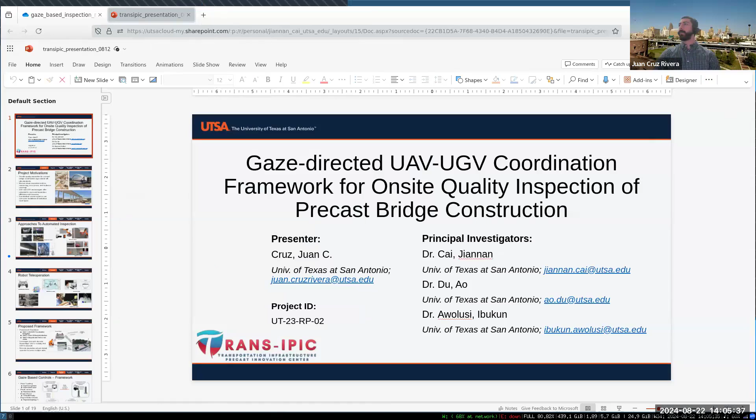Okay, so my name is Juan Carlos Cruz. I'm a master's student here at UTSA, and I'll be presenting our work on a gaze-directed UAV-UGV coordination framework for on-site quality inspection of precast bridge construction. So in these slides, I'll be going over some of our project motivations, as well as related technologies that led to our proposed framework, and then some of our developments thus far.

So one of our biggest motivations is that across the supply chain for prefabricated concrete structures and precast members, especially in the offsite fabrication, you have very thorough inspections that are done. For example, you have component dimensioning that's done after it's fabricated. You have different tensile strengths and material testing that are done, and various lab work that gets completed. And then once the bridge is fully constructed, you have very well documented and thorough regional and national level inspections that are done on these bridges.

However, when you get to the actual in-process and on-site construction, it can be a little more difficult to get very thorough testing and inspections done. As we see in the picture here, the sites can be very chaotic and dynamic, so it's difficult to get this thorough testing done. And it's for a variety of other reasons, like it's difficult to get sophisticated sensing and testing equipment out there. However, by doing it manually and having less rigorous inspections on site, we miss out on various structural deficiencies and defects that can come along with these members, either through the transport or something that was missed during the previous inspections.

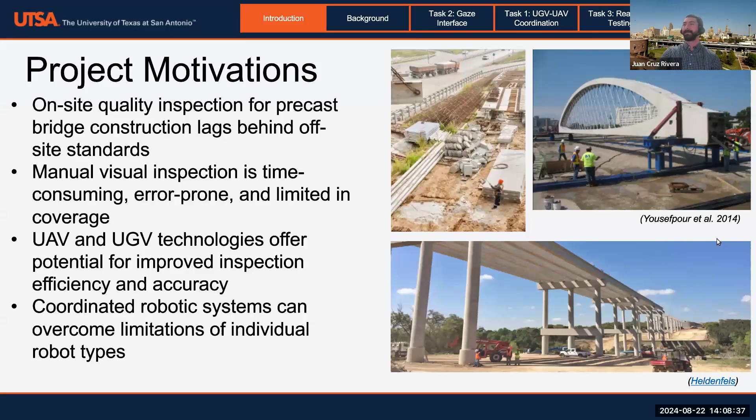So I'm going to discuss some of the other approaches that have been done to automate inspection. In some cases, we've seen works done that can do BIM to real monitoring. This can monitor different progress of a construction site to make sure structures are aligned and ensure the progress is going as expected. In the actual fabrication steps, you have intelligent robots that can be set up with different scanning equipment in order to check tolerances and see if there are any deviations in the output.

And all this is thanks to improved sensing techniques and technologies that let us get more accurate dimension and geometric dimensioning capabilities. We also see some specialized robots. In the bottom right corner there, you have a wall climbing robot that's able to monitor the health of different structures by monitoring the cracks and fractures that happen in these structures.

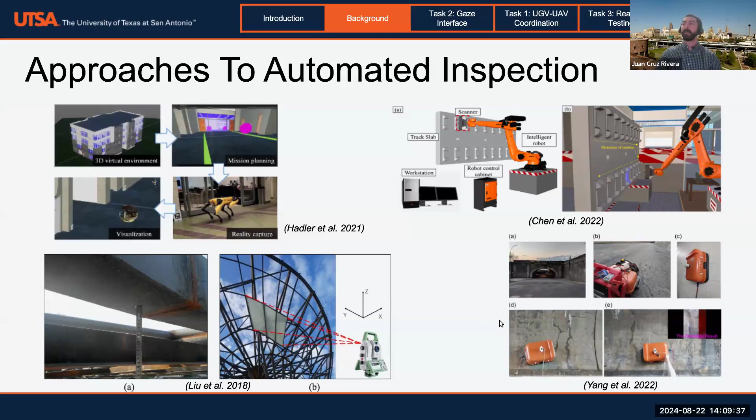One of the difficulties of these, though, is that generalized autonomy, having a fully autonomous robot, is still a very challenging task. So many of these robots are teleoperated. Teleoperation is when you have a human operator interacting with an interface, so a joystick controller or button-based controller, as we see there. You can also have pose-based control, where a human pose corresponds to a robot action.

You also see a lot of work being done with virtual reality headsets. It still takes advantage of some of the joystick-based control, but it augments the user's perception so they can see things maybe they couldn't see before and see them in a three-dimensional space. One of the benefits of these virtual reality headsets too is that they allow us to get gaze input.

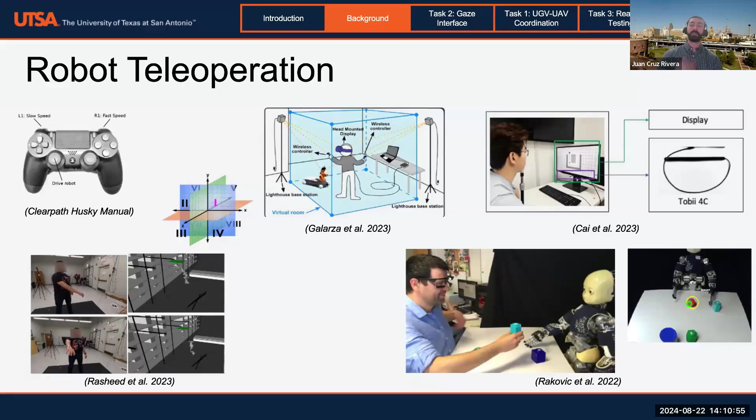In human-to-human communication, gaze is really important because it shows us the attention and intention of another party. It works the same in a robot-to-human task. We can use gaze to communicate objects of interest or to directly use gaze to control a robot through different mapping methods, as we see here.

So that leads us into our proposed framework. We broke down our framework into 3 different tasks that involve coordinated navigation between the 2 robots, using gaze-enabled and AI-enabled interfaces to improve productivity of the remote operator, and then, as mentioned before, to integrate and test these out in the real world, because that's very important in seeing the limitations of your framework.

Now, our proposed framework involves a remote operator. That means someone who is trained to do the inspection, with specific domain knowledge of how the inspection is supposed to be conducted, having them work in a remote office space or something like that, and then having the robots actually out in the field.

To circumvent that, we use ground vehicles, and that can be really any ground vehicle: quadrupeds, bipedal robots. In our case, we use the 4-wheeled robot. That robot would then go out with a specific payload suite, so different sensors and whatever is required for that inspection, and be able to do a more thorough inspection of the concrete member.

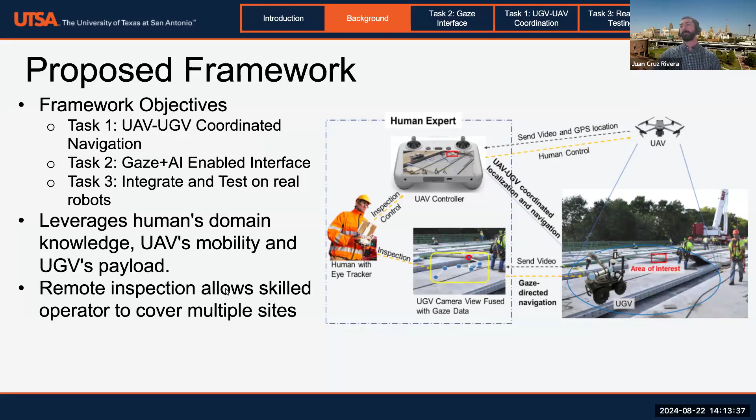Right, so as you can see there, our tasks are a bit out of order. That's because we started with a gaze framework beforehand, because we were doing work with gaze prior to this. For the gaze-based control, the framework we've developed thus far is primarily for the ground robot. That's taking the gaze through these glasses here. These are the Pupil Core glasses. They have a front-facing camera and then the gaze tracking elements here. The gaze tracking and the front-facing camera allow us to translate the user's gaze into the world view.

So that lets them correspond their gaze to where they're actually looking. And we use that technology to then select objects on the screen. So whenever we have our remote robot out in the field, we're able to stream the video, so the user can select objects from that video that they're interested in inspecting once the robot actually goes to the site.

So once the user selects the object of interest, that object is segmented. So that means it's automatically isolated from the rest of the scene. So if you have a large construction scene and a very noisy environment, you're able to isolate the object of interest. And then what happens next is we send that object to the robot, and the robot then finds that object in its scene and begins to navigate to it. So this lets us identify remotely what the robot should then be inspecting exactly.

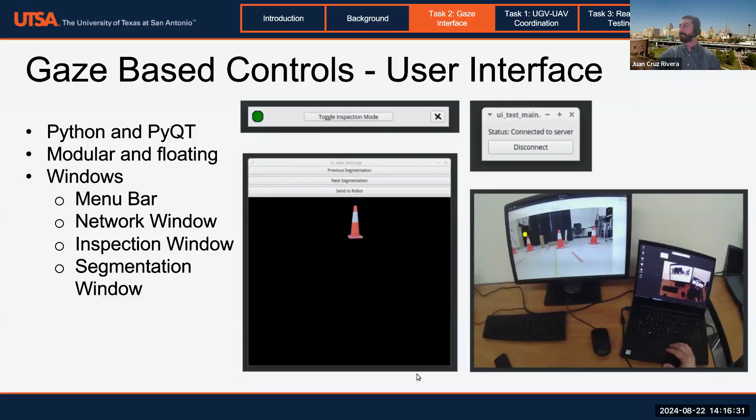So we conducted a pilot study using this framework to control the ground robot. For the pilot study, we had a remote robot and a remote operator inside our lab space. And we had 3 separate objects of interest to inspect. So we had a cone, a small wood plank there, and a large wood block.

So what we found out from this pilot study is, as you can expect, the small wood plank was more difficult for the user to land their gaze on. It could cause strain to the user's gaze because they had to keep reattempting that small, precise target matching. And then what we also saw is that through the matching method we used, even if the user lands their gaze on, say, that center cone, if you have various identical looking objects, it can have a false positive where the robot thinks it should inspect that instead of that.

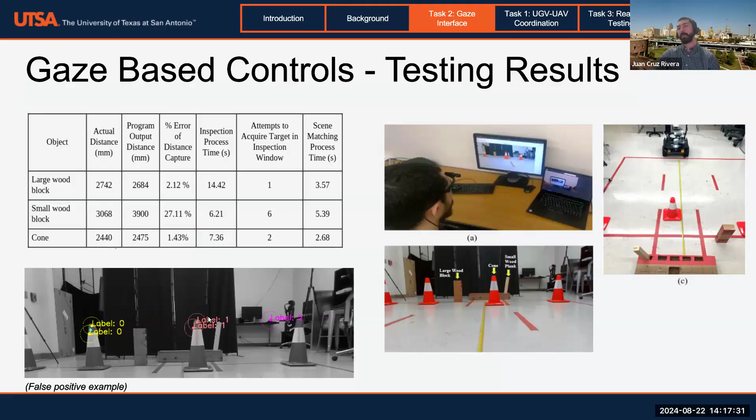Then after we did that, we opened up the lab space a little bit and reconducted the experiment, but then actually demonstrated the navigation portion of it. So this is sped up, but after the target would match in the center screen there, the robot then does some sort of inspection. In this case, it was just a little circle around the target.

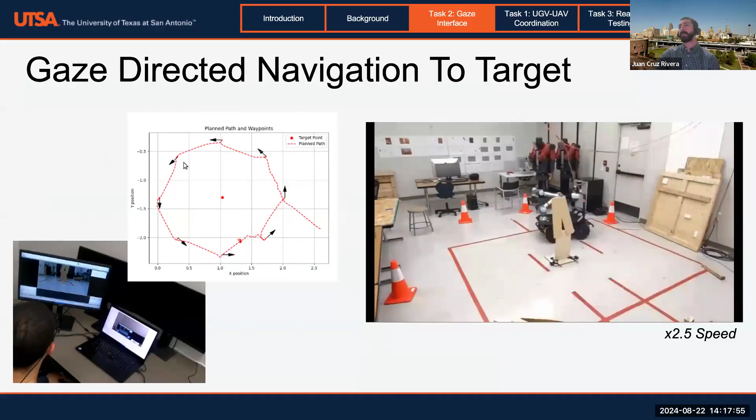Right, and that takes us to the multi-robot navigation portion. So as we said, this framework takes advantage of a drone and a ground vehicle. With a drone, we're able to cover a large area and different objects of interest in a site. So with our framework, the drone is driven to different objects of interest, different concrete members we want to inspect. And then the GPS point and contextual data is saved on a central server, what we call a base station.

And then once all those waypoints are gathered, the ground robot then localizes those and creates a navigation plan so it can cover different areas within the job site. And once the target is found with this framework, it doesn't do an autonomous inspection. In our case, it would request the human inspector, the remote operator, to help complete the inspection.

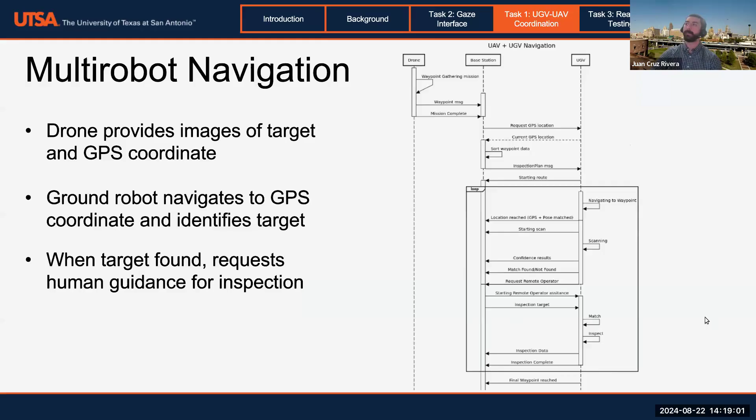Right, so we tested this outdoors, the first portion of it, which is developing the GPS-based waypoint package. So for this, we set up some waypoints right outside our lab space. So it's not too much of a distance. But this software package we developed is important because you can't directly translate latitude and longitude into robot movements. So you need some software in between to do that translation.

As you can see here, it navigates to the point, and then we use the same point to navigate it back to the starting point. And right here it's moving autonomously. Right, and then to simulate the mission, sorry, let me go back a little bit.

Here at UTSA, it's a little difficult to fly the drones outside. You need certain regulations. So we use a simulation for a lot of our drone work. Here in our simulator, which is a Gazebo simulator, we have the drone flying to a target of interest. I'll skip ahead a little bit here. And then it sets a GPS waypoint and gathers the contextual information that we said before.

So once you're actually at a GPS location, the ground robot navigates to there. You need to actually identify the object of interest. So in concrete structures, we know they're very similar looking if you're inspecting the same component type. So because of that, you need some way of directly identifying which object the user intended to inspect.

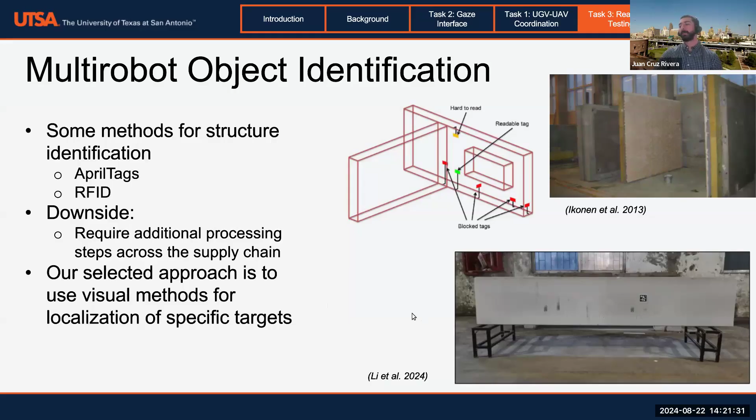And then for, say, AprilTags or QR codes, these might not be that durable, or they might affect the appearance of the structure. So our selected approach is to try to see if we can do this visually through different visual matching networks that are being done recently.

Oops, we go back. In this case here, at the top there, we have an image from the aerial perspective, so from a drone. And then the bottom here, we're capturing a video with the ground perspective. And sorry, it's still very low quality, but at the top right corner, you have a real-time rendering of a similarity. So in this case, you can barely see it, but it's 0.44, so 44%.

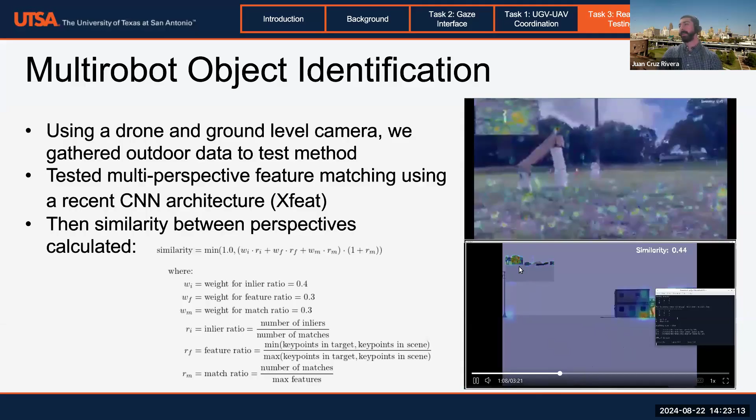We gauge similarity between two images based on the feature outputs and the matching outputs, as well as a homography calculation, which lets us do calculation between different perspectives. And at the bottom here, we also test this in real time in simulation. The simulation rendering is a little slow because the matching architecture comes out at about 8 to 9 frames per second, which is slower than what you would expect from a camera, so like 15 to 30, but it's still good enough to validate our method along different points. So at the top there, you see the target, and then here is a real-time video.

Okay, so then to actually conduct a simulation, and what we plan to do outdoors as well, let me skip ahead here. So the drone, prior to this ground robot simulation, went to the GPS location, which is around here where my mouse is, if you can see it. And then it captured images of the object of interest, which is here. It's like a crate or something. So what the robot then does is it navigates to the GPS point, as we can see there. So it's doing that autonomously.

And then once it gets to that point, it needs to figure out, from the reference image, which isn't shown in this video, sorry. From the reference image, it's able to gauge similarity between all of its scene. So it conducts a 360 scan, and then it continues to approach the target until it eventually says the similarity isn't improving anymore, so I'm going to request the human operator.

And this is because the GPS, depending on your sensors, can only get within meters of the specified target. So because of that, we need some additional method to get closer to the actual unique concrete member that we want to inspect.

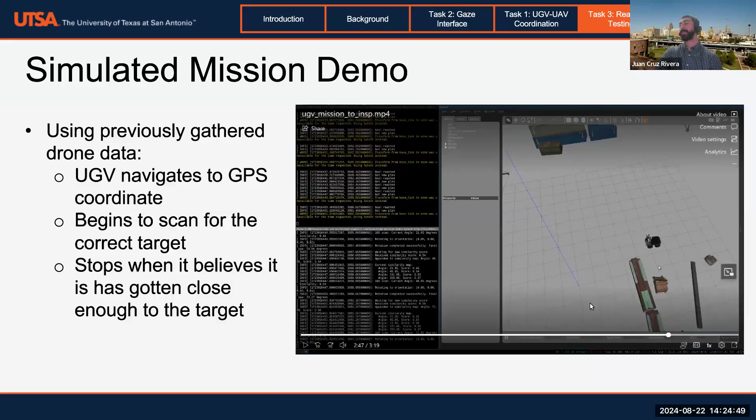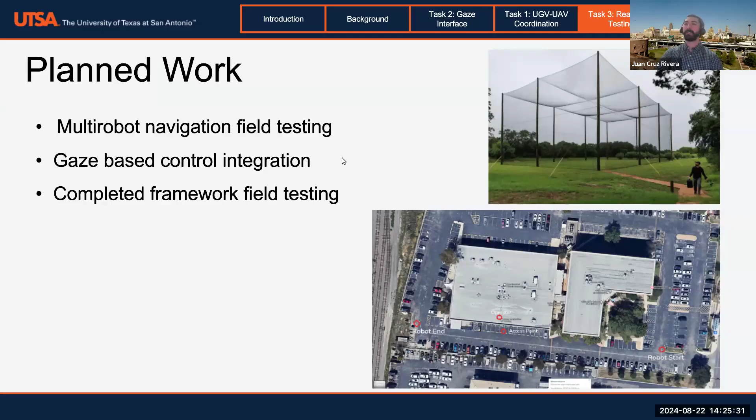Once we improve the gaze a little bit more, we're going to use that and integrate it into the completed framework to then test outdoors. And this is the drone cage facility we have here at UTSA. This is probably where we're going to conduct our final testing for this and set up some concrete structures out there.

Okay, so I think I'm under 20, but that brings me to my conclusion here. So for our testing thus far, we've seen that the gaze control methods can use some work, and we still need to integrate the drone method, which we're working on right now. It can be difficult to get those precise movements, but one method we have in mind to improve our method on that is to directly translate the gaze into the robot's video feed.

We're going to do that by bounding the gaze to the incoming video and then translating it directly to pixel points on there. And that removes the uncertainty of different feature matching methods. And then for the multi-robot navigation, one thing we want to do too is to create maps from the drone. So by mapping the scene with the drone, we're able to create more accurate navigation plans to more accurately move to the specific member of interest.

And in those maps, we'll probably still rely on the GPS points for localization, and possibly testing on some other ground robot platforms to see how they perform with this kind of framework. And then finally, for the object identification, with improved mapping that we plan on doing, we think that might help in actually localizing specific members in a construction site. So that's going to be our next steps.

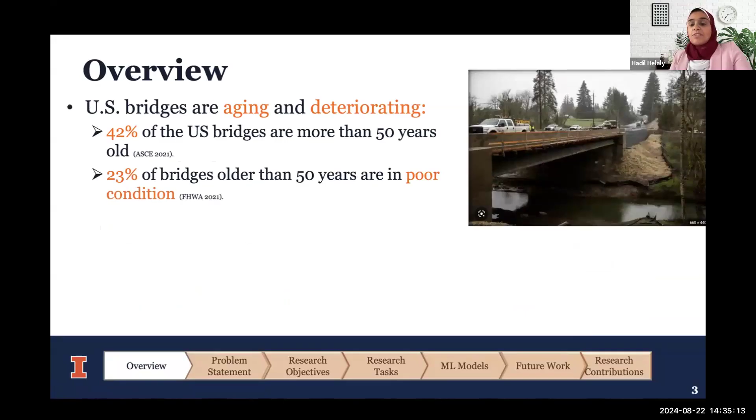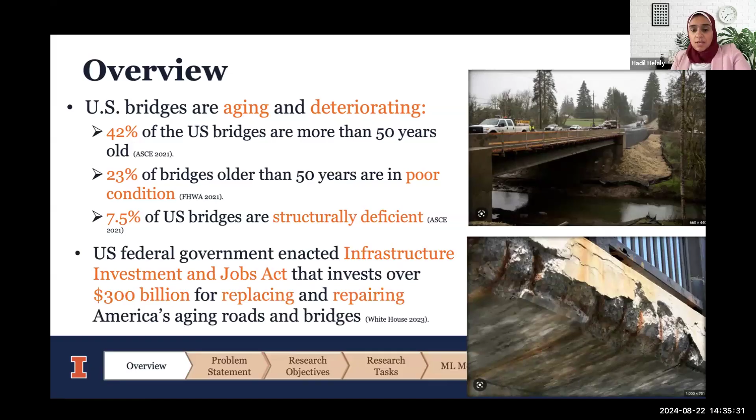As you may know, the US has more than 600,000 bridges nationwide. 42% of those bridges are more than 50 years old. According to the FHWA, 23% of those old bridges are in poor condition. Additionally, 7.5% of US bridges are structurally deficient. To address safety hazards caused by these aging and deteriorating bridges, the US federal government enacted the Infrastructure Investment and Jobs Act that invests over $300 billion for repairing and replacing US bridges and roadways.

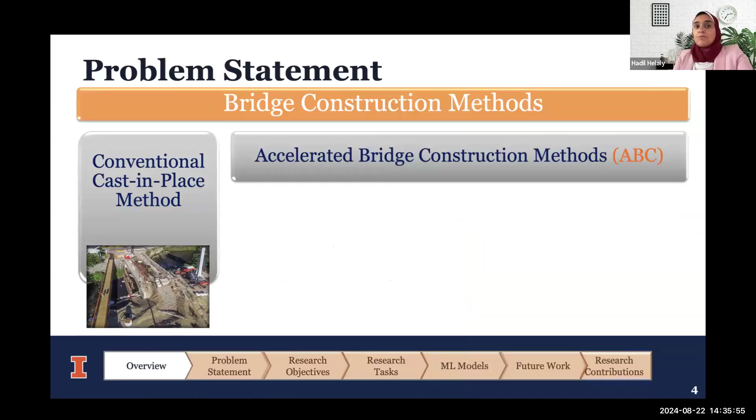Typically, those bridge projects utilize either the conventional cast-in-place construction method, where all the construction activities are performed on-site, or one of the accelerated bridge construction methods that focus mainly on reducing on-site construction time and traffic disruption, such as precast bridge elements, precast lateral slide, and precast self-propelled modular transporters. In the next few slides, I'm going to briefly explain each of those construction methods along with their advantages and challenges.

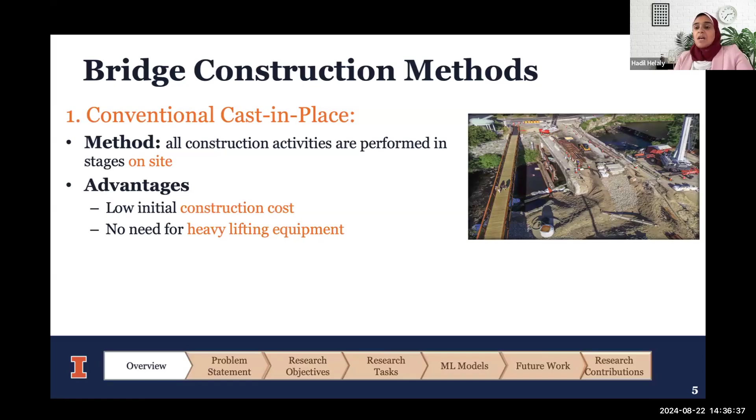Starting with the conventional cast-in-place construction method. As I mentioned, in this method, all construction activities are performed in stages on-site, such as earth moving, formwork, cast-in-place concrete, everything. The main advantages of this construction method are its low initial construction cost, and it does not need the use of any special equipment such as heavy lifting equipment. The main challenges: since all the activities are performed on site, it requires a longer construction duration, which leads to extended full or partial lane closures that lead to significant traffic delays and safety hazards.

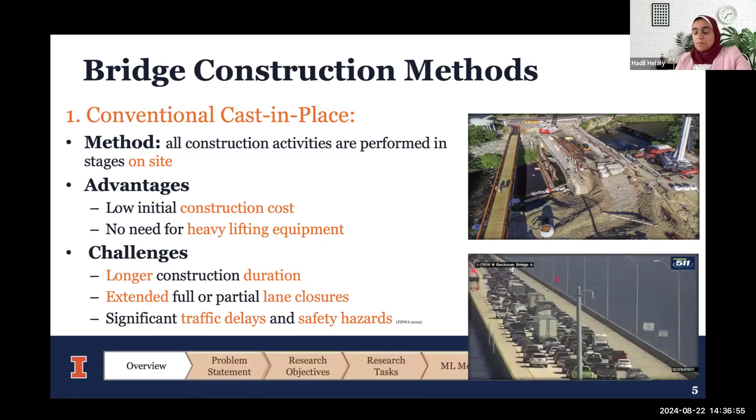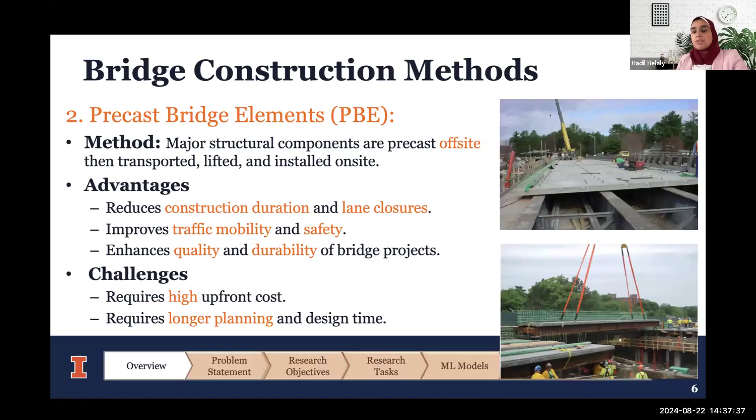Moving on to the precast bridge elements construction method. In this method, the major structural components are precast or built off-site, then moved and installed on-site. As expected, this construction method reduces the construction duration and lane closure. Also, it improves traffic mobility and safety and enhances the quality and durability of the bridge project. For the main challenges, compared to the conventional cast-in-place construction method, it requires higher upfront cost to order all those precast elements, and it also requires longer planning and design time to plan for all those precast elements, how they will be transported and connected together on site.

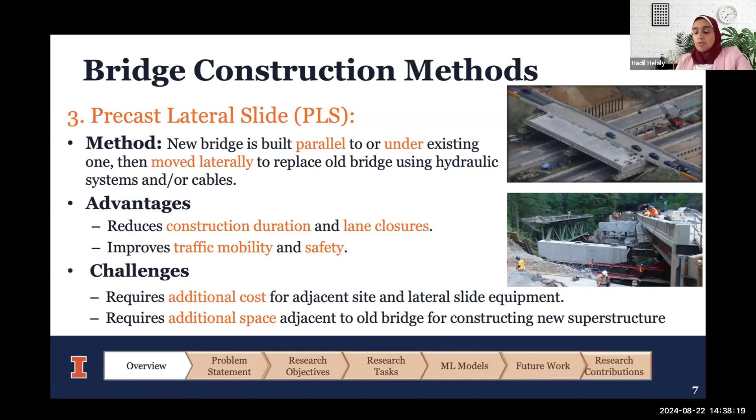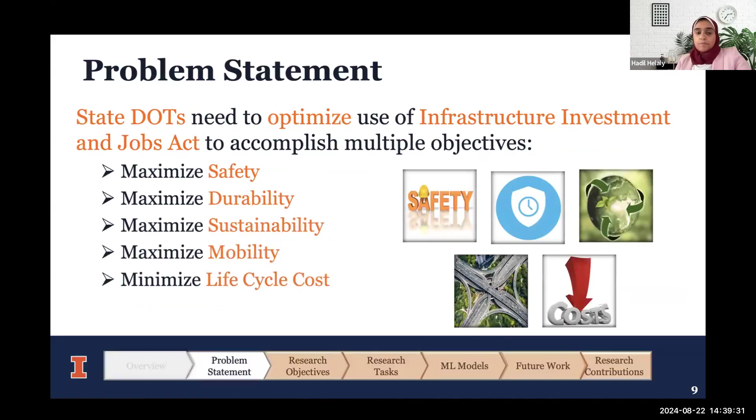The main problem that we're trying to solve in this project is that state DOTs need to optimize the funds they receive for those bridge projects in order to accomplish multiple objectives. Those multiple objectives are their strategic goals, including maximizing safety, durability, sustainability, and mobility, while minimizing the life cycle cost. To address this problem, we identified the major challenges facing decision makers in bridge construction projects. First, during the early design phase, where limited project data is available, decision makers need to decide which construction method to use in the planned project. One of the major factors in their decision is, of course, the cost. So they need to accurately predict the construction cost of alternative bridge construction methods in order to determine the most cost-effective one.

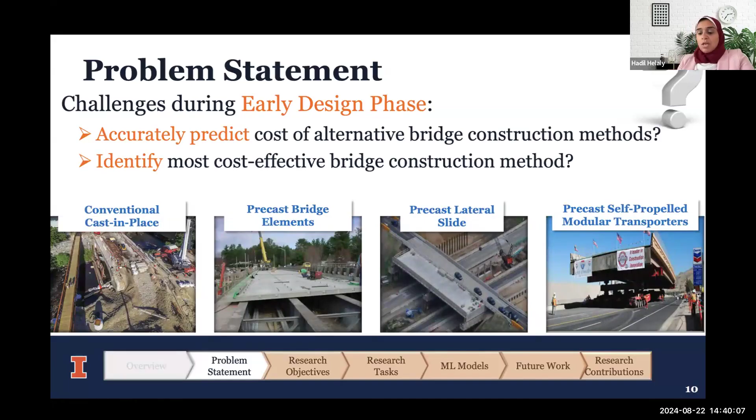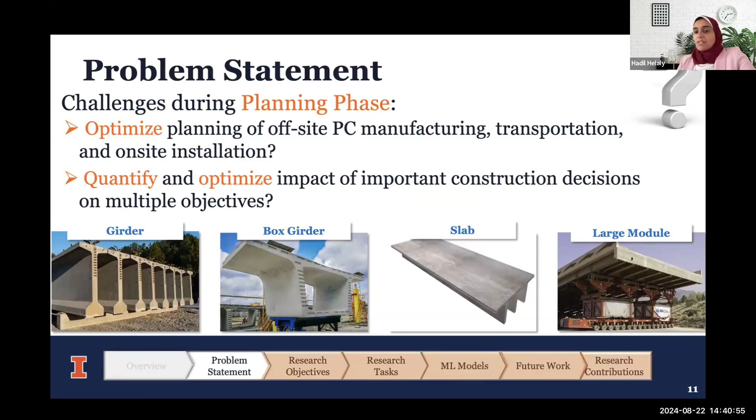While during the planning phase, after the design is completed, there are several construction decisions that need to be made carefully, such as the size of precast components, the transportation method, how many trucks will be used, if they decide to use SPMTs, what the optimal size of the SPMTs is, and also the installation equipment: do they need any special equipment or not? So they need to carefully select the optimal option for those construction decisions in order to optimize their impact on the entire bridge and also to achieve their strategic goals, as I mentioned a few slides earlier.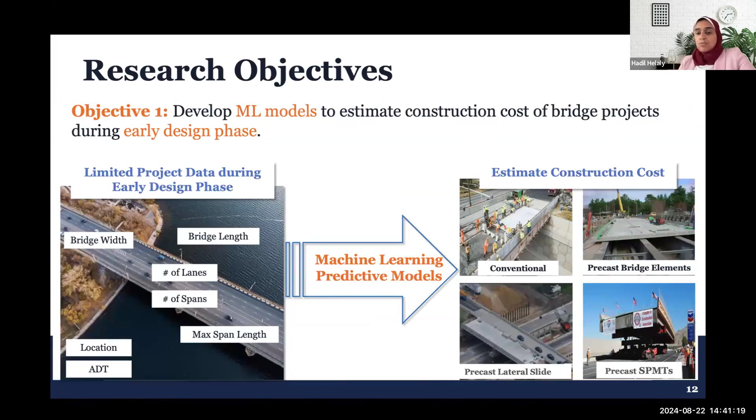To address this problem, the first objective of this research project focuses on assisting decision makers during the early design phase to estimate the construction cost of alternative bridge construction methods using the limited data available at this time. The best way to do this is to develop machine learning models that will help them do this. For the second objective, we need to assist decision makers during the planning phase to find the optimal solution for all of those construction decisions to achieve their multiple objectives, including maximizing safety, durability, sustainability, mobility, and of course, the cost. The best way to do this is to develop a multi-objective optimization model that can take all those construction decisions and provide them with the optimal solution they can use to achieve all their objectives.

Each of those objectives is translated into a research task. So the first task, which focuses on developing the machine learning models, was performed in four main phases. First, collecting available historical data of bridge projects utilizing alternative bridge construction methods.

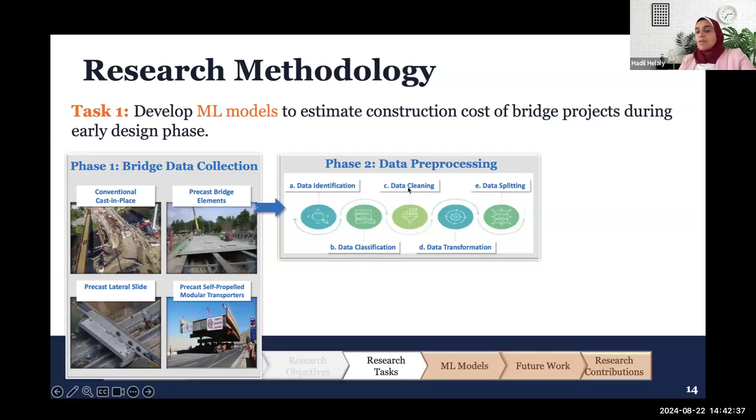Then, pre-processing or preparing the collected data to ensure its quality and reliability by first identifying the predicted and predictor variables, then classifying the predictor variables based on their type, then cleaning the collected data by excluding outliers, then transforming the collected data, and finally splitting the collected data into training and testing datasets.

The training dataset will be used in developing the machine learning models that are capable of estimating the construction cost of alternative bridge construction methods during the early design phase. And finally, we need to evaluate and validate the performance of those developed machine learning models using the testing dataset.

Now that I have covered the general plan, I will go over each of those phases and explain them in more detail, starting with bridge data collection, the first phase. In this phase, we were able to collect historical bridge projects that were constructed between 1992 and 2024 from 29 different US states, including Illinois, Utah, Pennsylvania, Colorado, etc. It should be noted that each of those DOTs or sources has its own unique system to store their data, and we had to deal with each one of them individually.

An example here is a project that we collected from IDOT, the Illinois Department of Transportation. We collected the data from three main sources. First, we had to access the contract detail page to collect the general information about the project, the general description, the total cost of the project, and the duration.

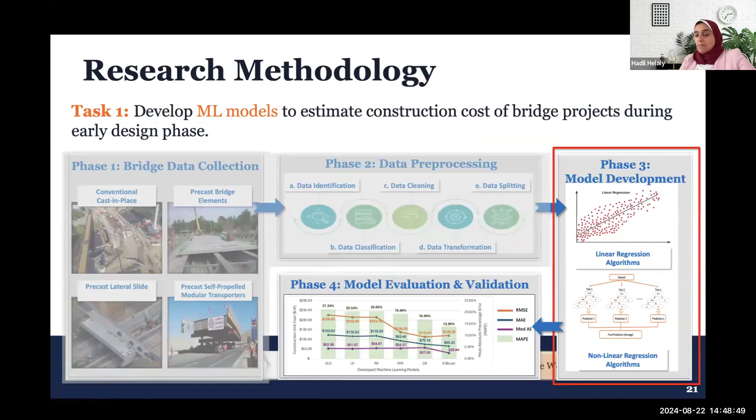So now we're going to move on to the third phase, which is the model development. In this phase, we selected 6 different machine learning algorithms that are widely used in similar problems and can accurately estimate the construction cost of alternative bridge construction methods. 3 of them were considered linear regression algorithms, or in other words, simple machine learning algorithms, including ordinary least squares, lasso, and ridge regression.

While the other 3 are considered non-linear regression algorithms, or advanced machine learning algorithms, that we decided to explore to see if they give us a better performance. Those non-linear regression algorithms include random forest, gradient boosting, and extreme gradient boosting.

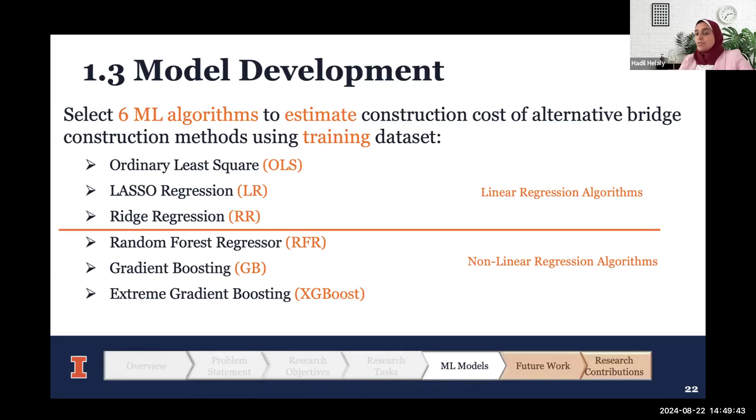And as I mentioned before, we're going to use the training dataset, the 80% of the dataset, to develop or train those models. After that, we need to evaluate and validate the performance of the developed machine learning models. To do this, we're going to use the testing dataset that was never used or seen before by the developed model, and we're going to compare the predicted values to the true values for each developed machine learning model.

To calculate the error for each of those machine learning models, we decided to use 4 different metrics, including the mean absolute percentage error, mean absolute error, median absolute error, and root mean square error. As you can see, all of those metrics calculate the error, but in a different way. All of them are widely used, and we decided to calculate those 4 metrics for all 6 developed machine learning models and compare between them to find the best performing model.

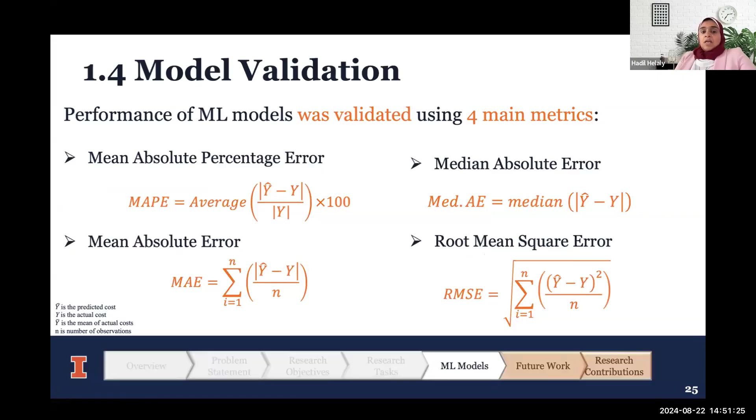And here is the result of the 4 main metrics for each developed machine learning model. As you can see here, in general, the non-linear regression models perform better than the linear regression models. And if we dig deeper into each of those metrics, we're going to find that XGBoost provides the lowest MAPE of 13.9%. It outperforms all other machine learning models, and it also provides the lowest mean absolute error of $65.2 per square foot and $29.9 per square foot for the median absolute error, while gradient boosting provides the lowest root mean square error of

$113 per square foot. To conclude our work in the first task of this research project, we decided that XGBoost is the best performing model among all of the developed models, because it outperformed all the other models in 3 different metrics, as I mentioned.

Moving on to the second task, that focuses on developing a multi-objective optimization model to optimize the impact of construction decisions on bridge projects during the planning phase. This task is still in progress, but I'm going to explain the general plan of this one. Again, this task will be performed in 4 different phases.

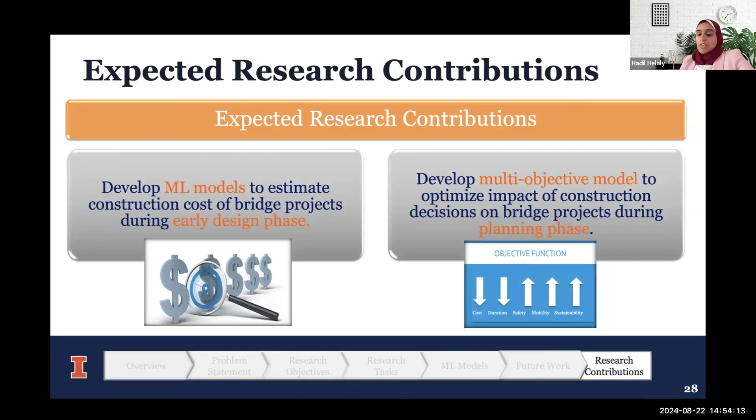This research is expected to have a significant impact on improving the accuracy of predicting the construction cost of bridge projects utilizing alternative bridge construction methods based on the early design data available. Also maximizing the safety of the traveling public and construction workers in and around the work zone, maximizing the project durability and sustainability as well, while maximizing traffic mobility during the bridge construction project, and finally minimizing the total cost of the bridges, including off-site prefabrication costs, shipping costs, and on-site construction cost.

The result of this work resulted in 3 different publications. There are 2 papers already under review. One of them we submitted to the Canadian Journal of Civil Engineering, and the other one to the ASCE Journal of Construction Engineering and Management, while we are still working on the third paper. With that, thank you so much, and I'm ready to answer any question.

Thank you so much, Hadil. Sorry, you can't give a round of applause as you normally would, but maybe not on a webinar. Any questions for Hadil?

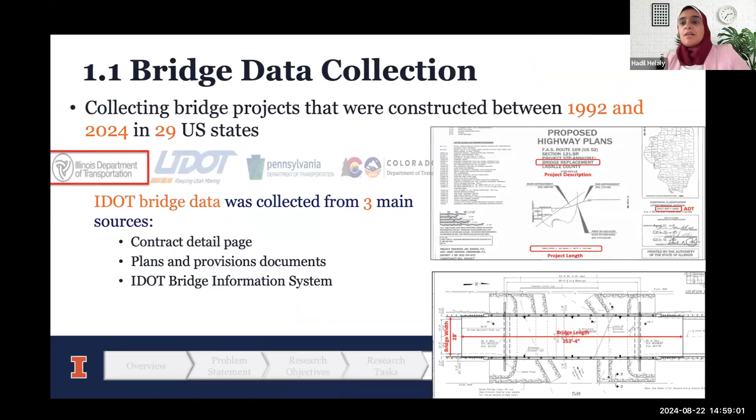Yep, exactly. That's why we use the 2024 RSMeans to account for the variation of the construction years and location. So all the data that we collect from different states are now considered for the national average and the 2024 cost. I see. So you're converting. Yep, yeah. Thank you.

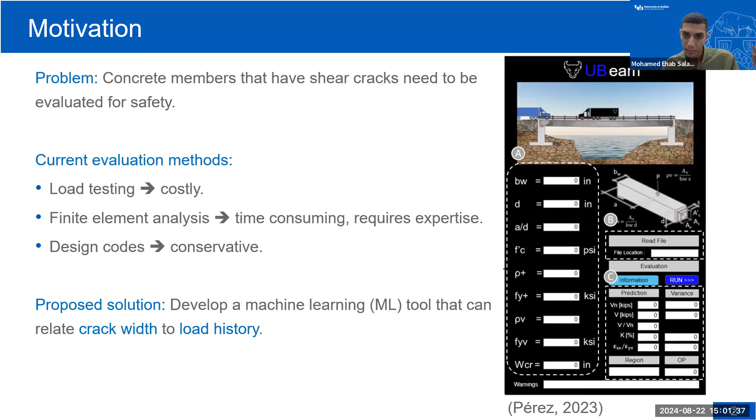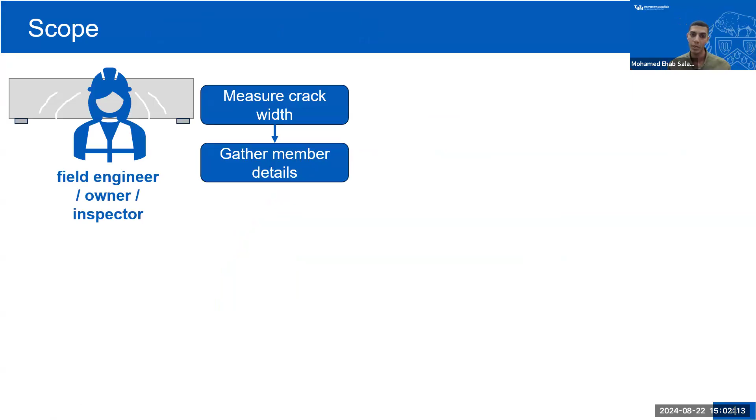Our scope is to help the field engineer to evaluate the cracked member. The field engineer goes to site and measures the crack width and collects all information about the cracked member. Then our turn at UB is to predict the shear strength by collecting shear test data and training a machine learning algorithm to predict the shear strength. This step was discussed in detail in the TRANS-IPIC in-person workshop.

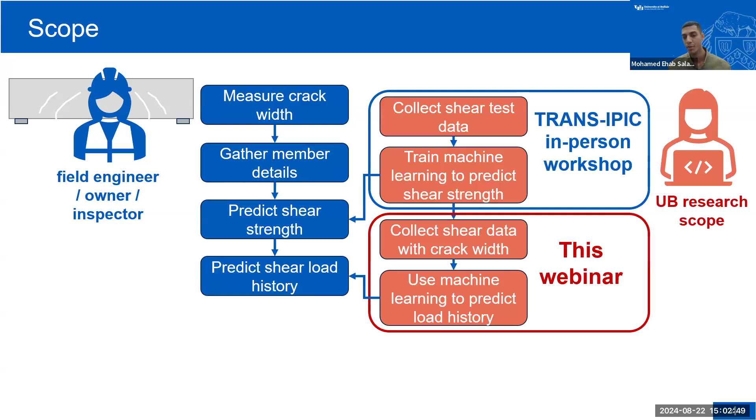The second step, which is our focus at this webinar, is to predict the shear load history by collecting the shear data with crack width records and training a machine learning algorithm to predict the load history. By knowing the shear load history and the shear strength, we could determine the shear load to strength ratio. This ratio would help the inspector determine which bridge is most critical.

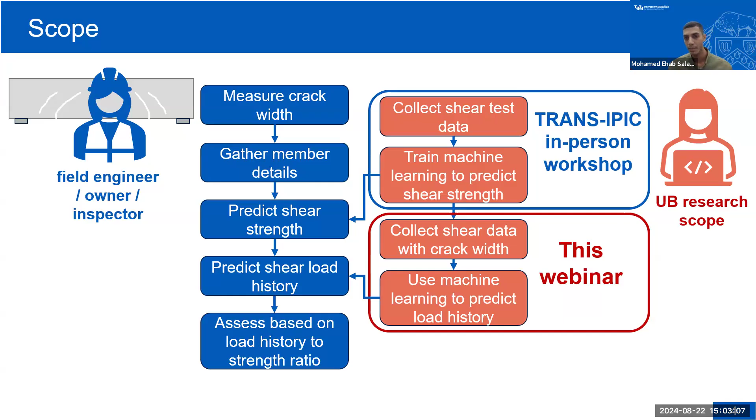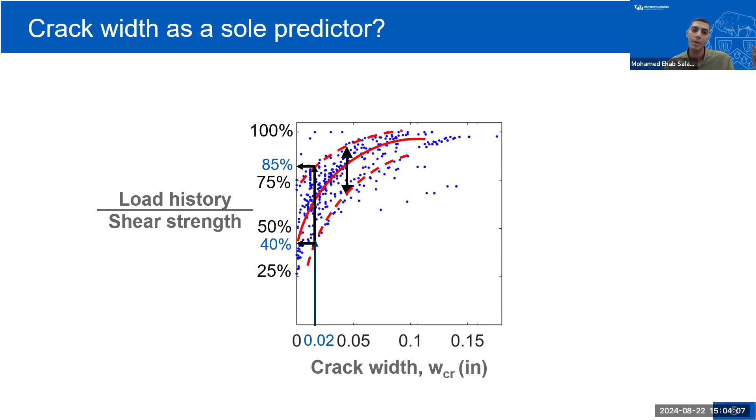We need additional features to be added to our model so that our prediction for the loading ratio could be more accurate. We have chosen these predictive features, which are beam size, material properties, pre-stressing and reinforcement detail.

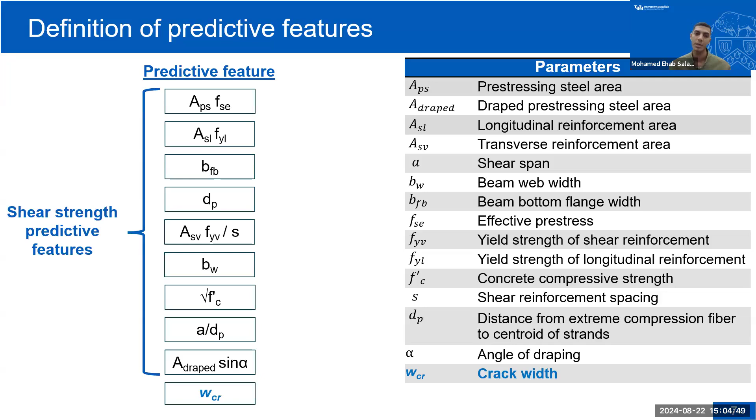Then we have to define the predictive features which are used to train the machine learning algorithm. So using the parameters in the table on the right, we have constructed 10 predictive features. The first 9 are used as shear strength predictive features, and the whole predictive features are used to train the load history prediction. It should be noted that all these parameters are chosen to be easily extracted from the site investigation or from the structure drawing.

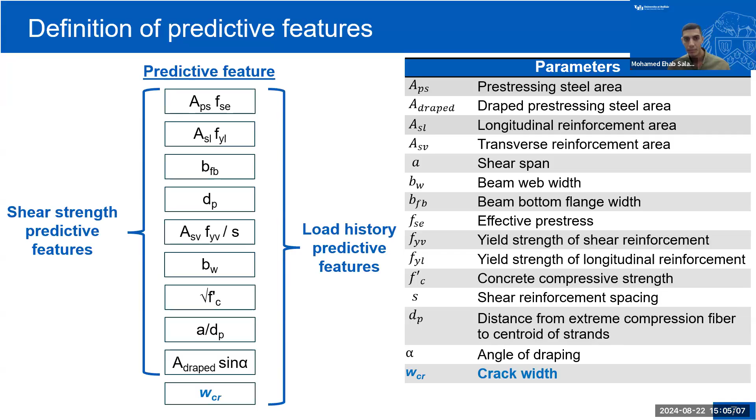Then we have chosen 3 machine learning algorithms. These machine learning algorithms are the linear regression, support vector, and the Gaussian process. It should be noted that we have chosen these algorithms because they do not require a large data set to be trained and do not require high computational power for training.

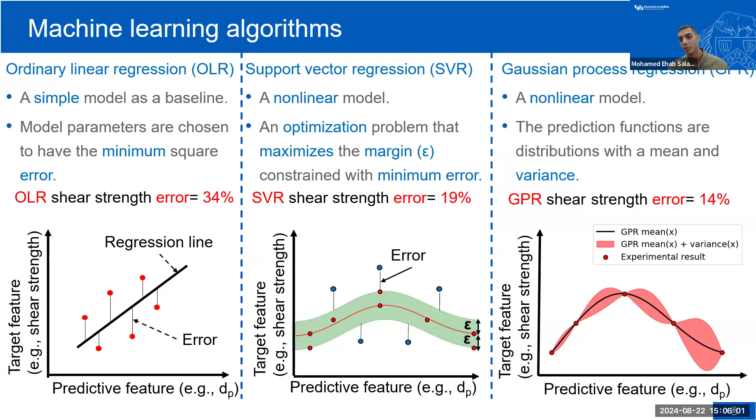As a review from the previous TRANS-IPIC in-person workshop, the linear regression error was 34% to predict the shear strength. Support vector had a shear strength error of 19%, and 14% for the Gaussian process. As it is shown that the Gaussian process gives the least error, our focus at today's webinar is using the Gaussian process because it is the algorithm which has the least error.

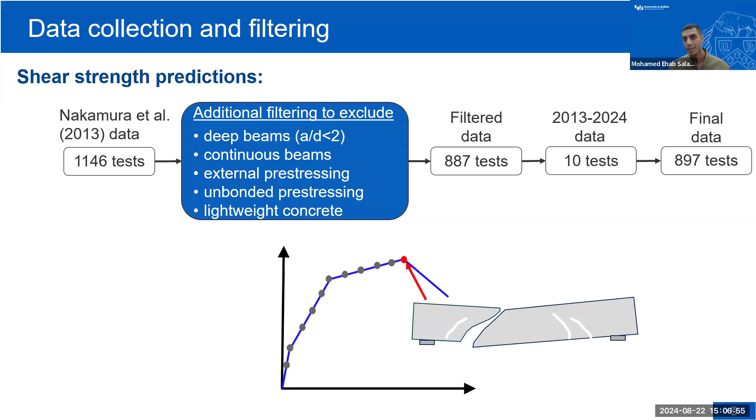Then we start with collecting the data and filtering this data. So we start with the Nakamura 2013 data set. Then we make additional filtering by excluding deep beams, continuous beams, external pre-stressing, and lightweight concrete samples. Then we complement our filtered data with samples between 2013 and 2024. So our final data was 897 tests. It should be noted that only 10 beams were complemented to the filtered data because most of the research in this period focused on the effect of unconventional materials such as fiber, synthetic fiber or steel fiber.

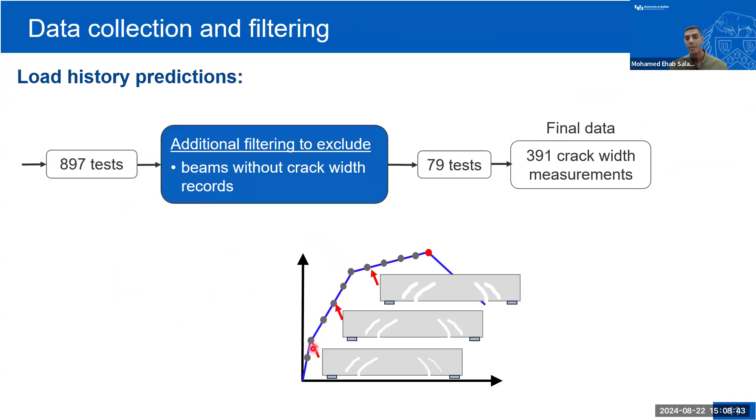Then we go for collecting and filtering of the data for load history prediction. So we use the final shear strength data, and we make additional filtering by excluding any beam without a crack width record. So finally, we have 79 tests with 391 crack width measurements. It should be noted that each test could have multiple crack width records. Then we go for a visualization of the load history data set. It should be noted that here there is an additional feature, which is the crack width.

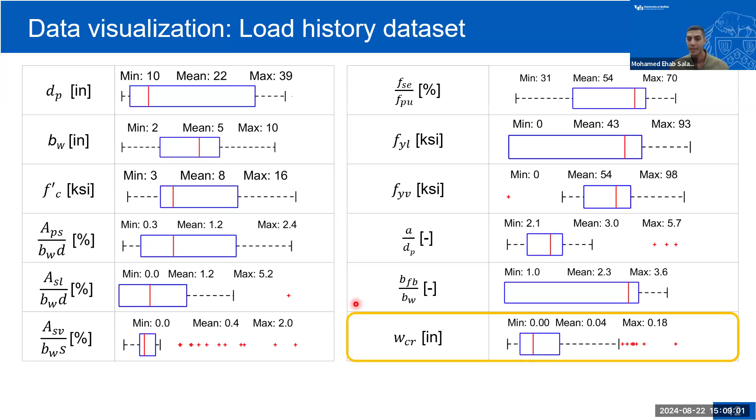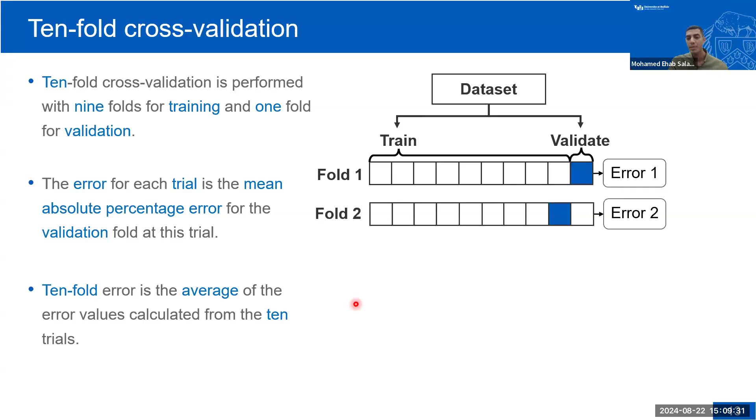Then while we are training our model, we have performed a 10-fold cross validation. 10-fold cross validation is splitting the data set into two sets, validation set and training set. So at the beginning, we split our data set into 10 partitions, 9 partitions for training and 1 partition for validation, and we calculate the error for the validation set. We repeat this step 10 times, then finally we calculate the average of these error values to be the 10-fold error.

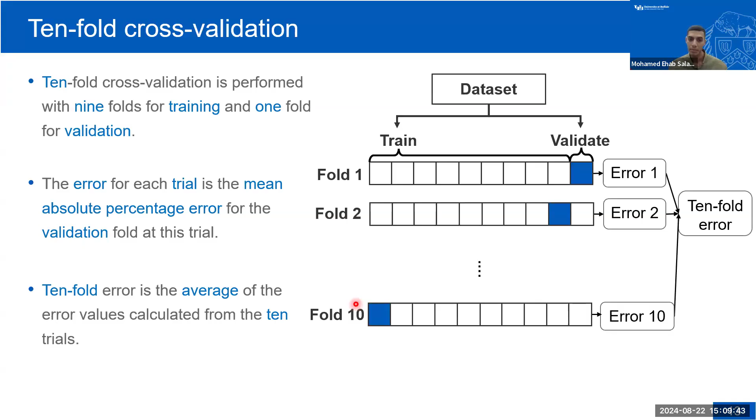Could you hear me? Yes. Yes, you froze for a moment, but we're good now. Go ahead. Just 1 second. Can you hear us, Mohamed? Oh, we lost him. Oh, no, you're here. Okay, we lost your screen, so you have to reshare. Okay, coming back up. Okay, we can see your screen again.

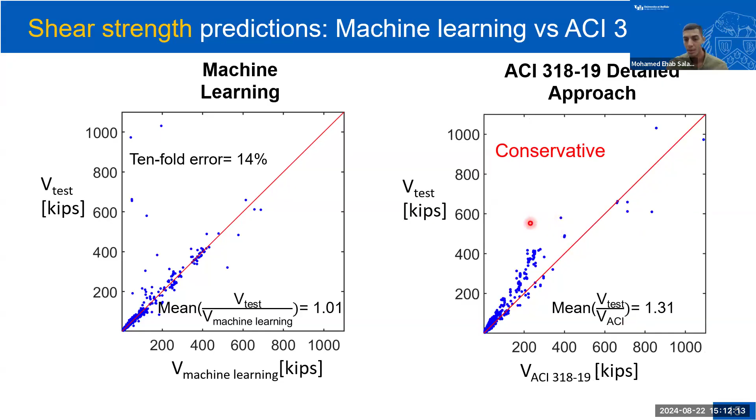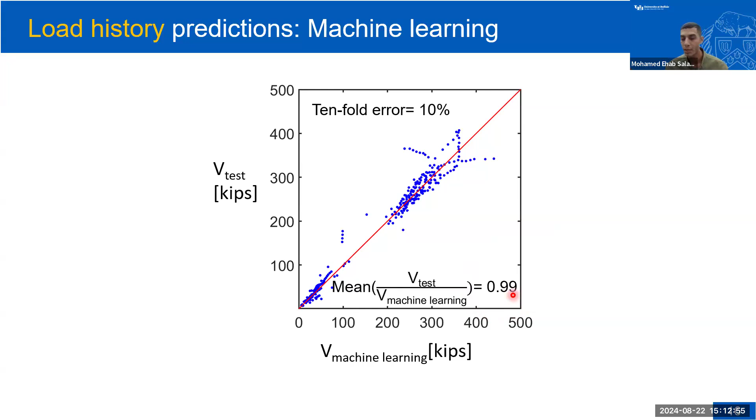Then to evaluate the machine learning prediction for load history, this plot is drawn. On the horizontal axis is the predicted load history by machine learning, and on the vertical axis is the experimental load history. The mean ratio was 99%, and the error was 10%. It should be noted that there is no current evaluation method for predicting the load history for pre-stressed concrete members. So there is nothing to compare with.

Then we would like to demonstrate our model using unseen beams. So at the beginning, we excluded 4 beams out of the training sample to be used for final validation of our machine learning algorithm. We have chosen these beams to include shear reinforcement and to have 0 shear reinforcement. So we have chosen 4 beams. Two beams have shear reinforcement less than the minimum. One of them is poorly represented by the data, and the other one is well represented by the data. The other 2 have shear reinforcement exceeding the minimum shear.

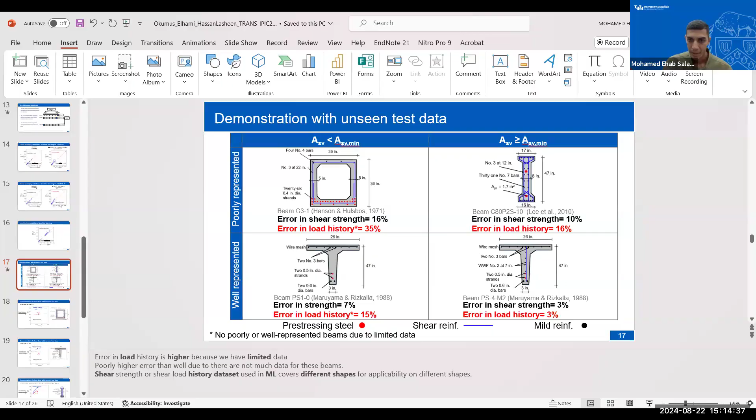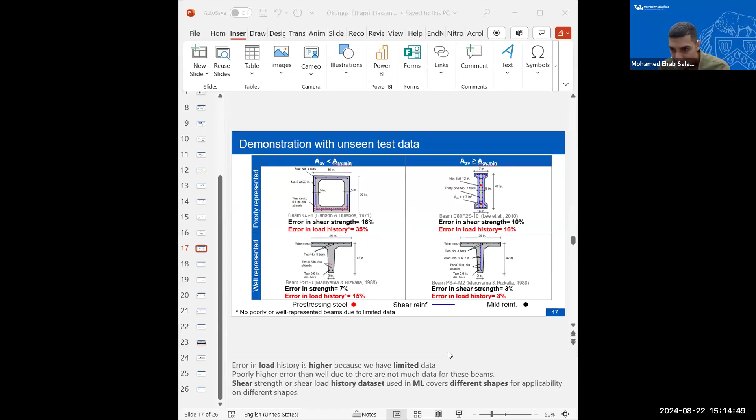We lost your screen. You stopped sharing your screen. Okay. Could you see the screen again? Nope, not yet. Yeah, it's coming now. Yep. Go ahead. Okay. So this is our result for the first beam. The error was... I'm sorry for this technical problem. Could you see the screen? Yeah, yes.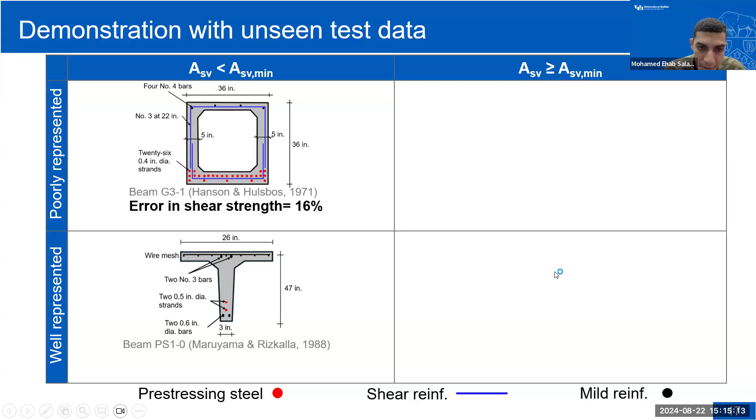So this is the result for the first beam, which has shear reinforcement less than the minimum shear, and it is poorly represented. This is the result for the second beam. It should be noted that the shear strength error was 7% for the well represented, and it is less error than the poorly represented sample, as expected. For the third beam, which has shear reinforcement greater than the minimum shear, the error was 10%. For the fourth sample, which is well represented and has shear reinforcement greater than the minimum shear, the error was 3%.

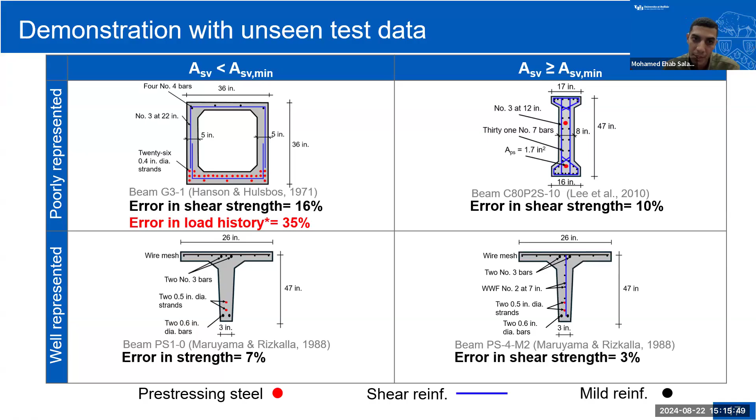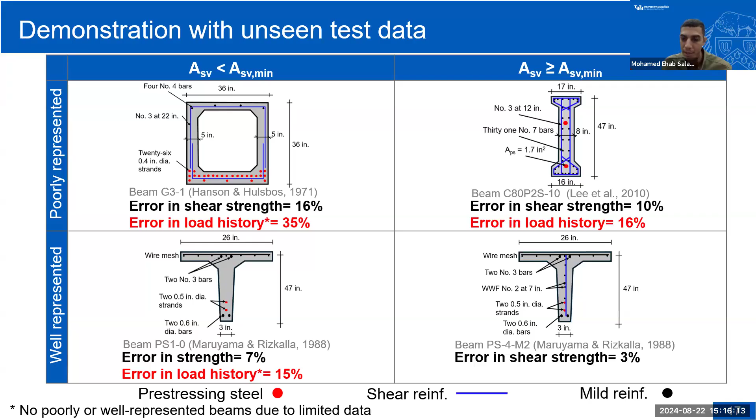For the load history prediction, the error was 35% for the first sample, which has shear reinforcement less than the minimum shear, and 15% for the second sample. It should be noted here that we have only 11 samples with shear reinforcement less than the minimum shear, so there is no poorly or well represented beam. For the second data set, which has shear reinforcement greater than the minimum shear, the error was 16% for the poorly represented specimen and 3% for the well represented specimen.

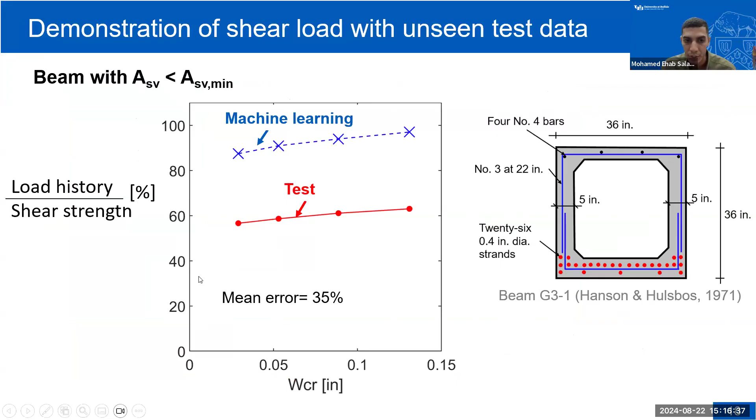Here we are plotting a relation between the crack width on the horizontal axis and the loading ratio on the y-axis. The red line represents the experimental result, and the blue one represents the machine learning shear load history prediction. For the first sample, the error was 35%. For the second sample, the error was 15%. For the third sample, the error was 16%. And for the last sample, the error was 3%. It should be noted that our data set includes different shapes, so our machine learning algorithm is suitable for different shapes.

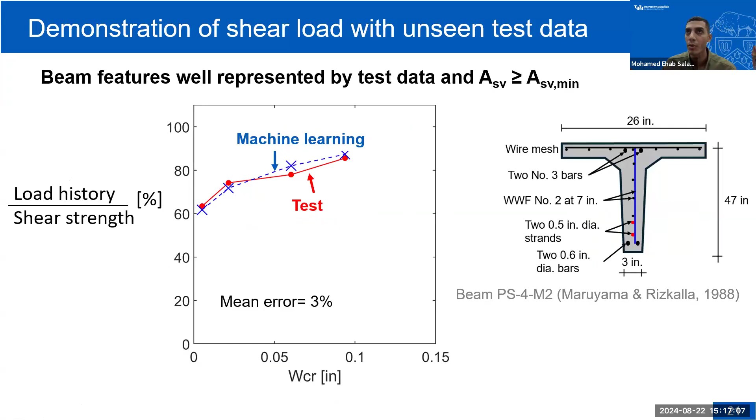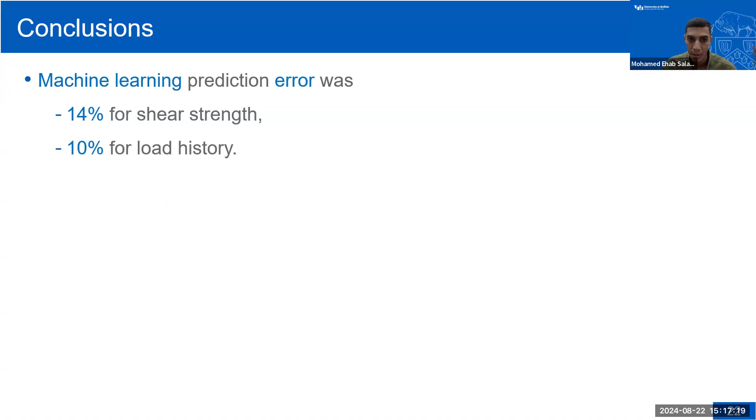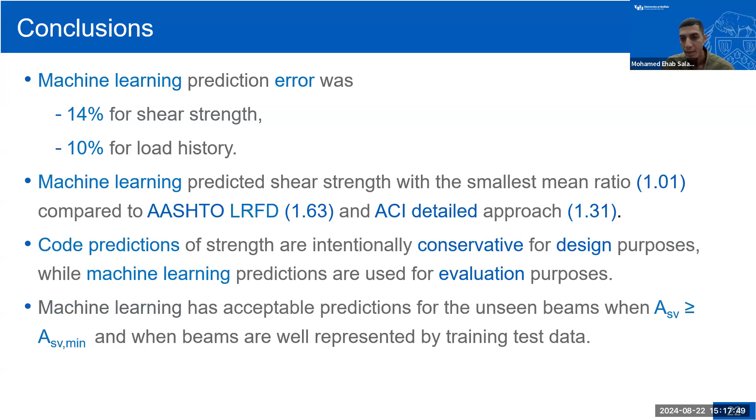For the conclusion, machine learning prediction error was 14% for the shear strength and 10% for the load history. Machine learning predicts the shear strength with the smallest mean ratio, 1.01 versus 1.63 for the AASHTO and 1.31 for the ACI. It should be noted that the codes are intentionally conservative for design purposes. However, the machine learning purpose is evaluation, so we need accurate prediction. Machine learning prediction was good when we have a well-represented sample having shear reinforcement greater than the minimum shear. So any additional data of higher quality would improve machine learning prediction.

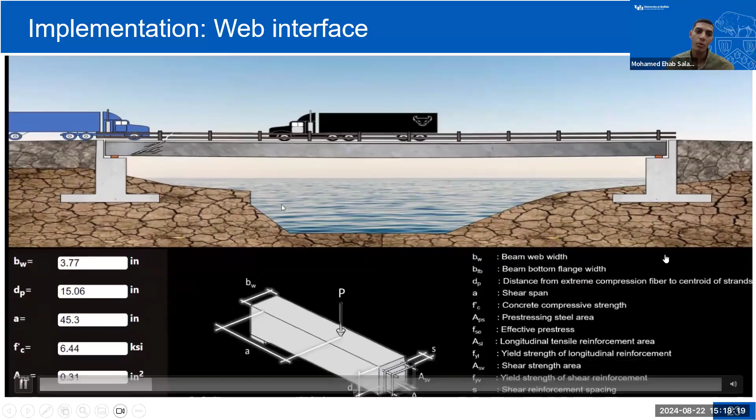This is our final product, which is a web interface. I will play a video to show a demo for using this web application. This is a cracked member. As an input, we put the beam size, material properties, pre-stressing, and reinforcement detail. And finally, we insert the crack width and press calculate. The first value is the shear strength, the second one is the shear load history, and the third value is the loading ratio. So by determining the loading ratio for different bridges, we could determine which one is the most critical.

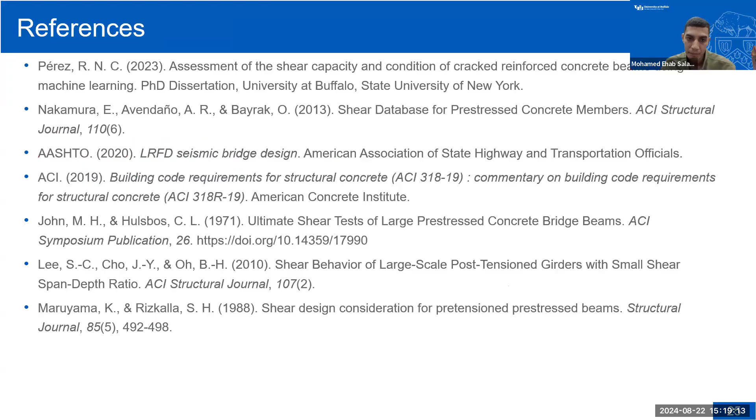I'm just asking. I think this 10% is good and acceptable, because if we are comparing it to the design code, the error is 30% and 40%. So the machine learning prediction has the least error compared to the available evaluation methods.

But civil engineering projects involve humans, materials, structures. So if the failure rate is that much, failure rate meaning the error is that much deviated from zero, then how good it is, I have a concern. I'm not an expert in that, I'm just asking from my curiosity. I think this value is good and acceptable compared to the other evaluation methods.

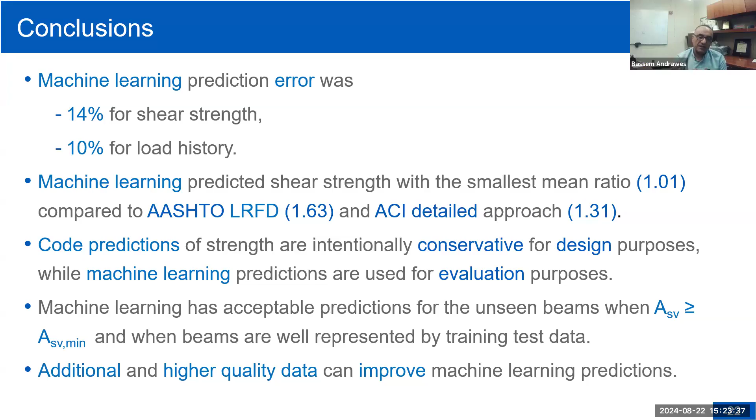Can you comment on, and maybe you already took this into account, the effect of the bridge deck on the results? If you take the composite action of the bridge deck along with the cross sections that you showed, how would this affect your results? You are speaking about the information I inserted into this web application? The cross section that you have, did you consider the composite action between, let's say, a precast girder and the deck?

Yeah, while I'm training the model, there are samples with composite sections. So the depth considers this composite action. Some samples have decks, some don't in the training data set. The definition of depth is from the extreme compression fiber, including the deck, to the centroid of the prestressing. And that is reflected in this web interface software, right? Yeah, Professor. Okay, very good.